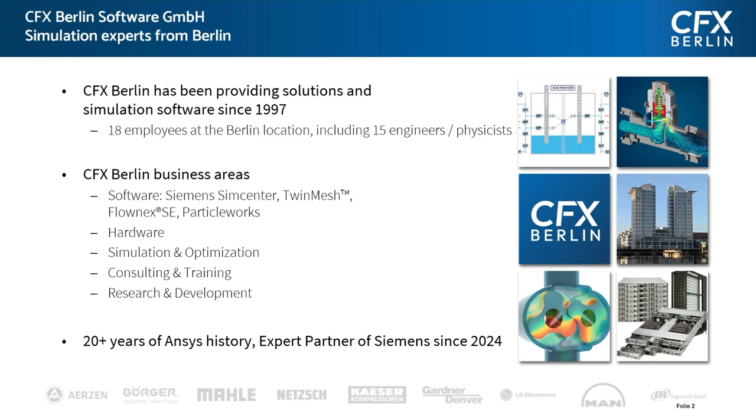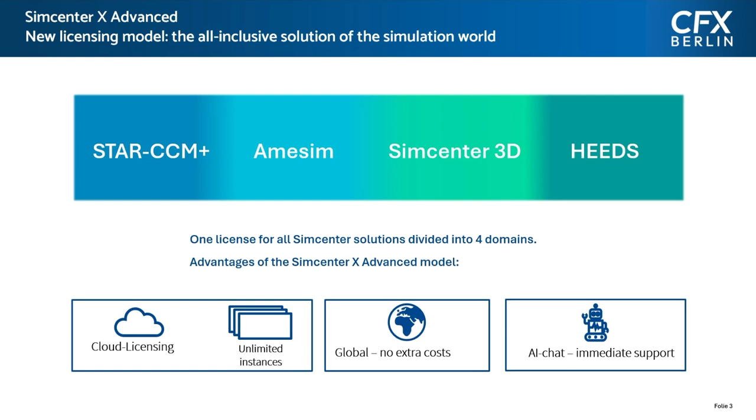Okay, so then let me start. Now let me introduce TwinMesh.

TwinMesh was developed by CFX Berlin to enable high quality CFD for rotary positive displacement machines, for example, for screw compressors or gear pumps or lobe blowers. And it brings all the required steps into one unified end-to-end workflow so users can work efficiently and focus on the physics instead of manual meshing and repetitive CFD setup tasks.

The workflow consists of 3 main steps. At first, the CAD import to extract the fluid volume and divide it into the stator part and the working chamber part, like you can see here on the flow from the left side. The next step is the meshing, where the stator mesh is generated.

You can use any meshing tool you have, for example, in Simcenter STAR-CCM+ or in ANSYS products. And the working chamber mesh is generated by TwinMesh, using a specialized meshing strategy, which I will discuss later. After that, TwinMesh will export a full setup, so you can start your simulation right after exporting all the meshes and the setup, because the CFD setup will also be available then.

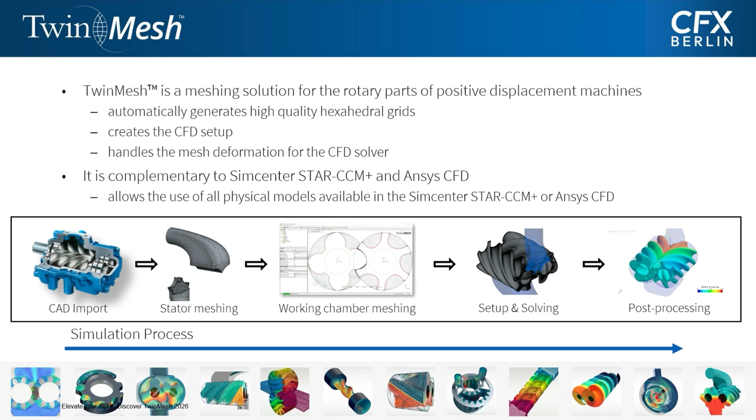So the next thing, where is TwinMesh used? TwinMesh is used across a range of rotary positive displacement applications. The key areas include screw compressors and expanders, screw vacuum pumps, gear pumps, gerotor pumps, and a lot more. We are proud to support leading companies working in these applications. Many of our clients have used TwinMesh for years and value its reliability and efficiency. On the right-hand side, you can see some of our customers which are using TwinMesh right now.

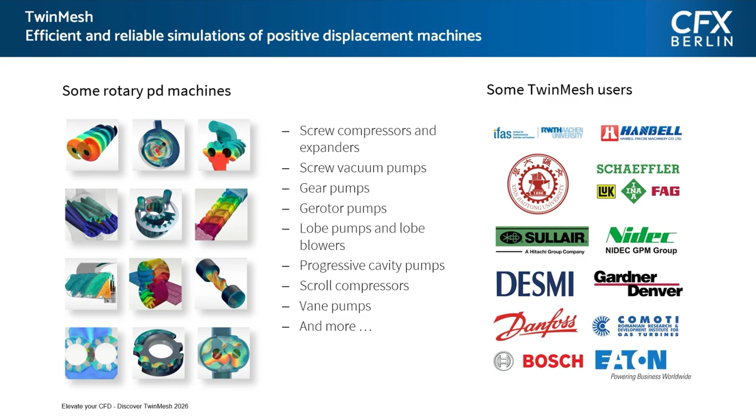So what are the challenges? The question is why we need TwinMesh. Let me illustrate this with a screw compressor, as shown on the right. The compressor is cut open so you can see the working chamber. There are two intermeshing rotors.

Due to the rotational motion, the flow volume changes continuously. Additionally, there are very thin clearances between the rotors, and between the rotors and the housing, in both radial and axial directions. Because the flow volume is time varying, a transient simulation is required. The fluid behavior can be complex in compressors. Compressibility is essential, and with high pressure and temperature, real gas effects become important. In pumps, cavitation must be considered.

On the other side, there is an interest in structural effects. For example, thermal deformation affects clearances, which could lead to leakage losses. Altogether, these factors impose specific requirements on the CFD.

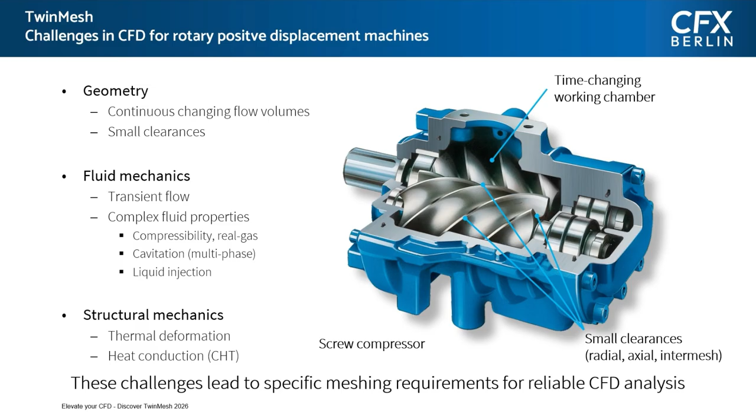So now let's look at the discretization options for the flow domain and why TwinMesh is needed. There are several meshing approaches, each with different strengths and limitations.

The first one is overlapping meshes. Could be that you know this type of mesh or meshing approach.

It's also called immersed boundary or overset. Here for the immersed solid approach, a background mesh represents the working chamber. In this case, the background mesh is the blue one, and you have in the foreground a mesh which describes the rotor solid, the orange part. During the simulation, the rotor mesh rotates.

In this case, the solver determines the overlapping volume, applies momentum sources, or combines the meshes to calculate the impact of the rotor motion on the fluid.

This meshing is simple, but there are drawbacks. For example, the near wall accuracy is limited. Boundary layer effects are hard to capture without fine cells. And the model becomes large. Runtimes increase and stability issues can occur.

That's why we go to the next type of meshing, which could be remeshing. With remeshing, a new mesh is automatically generated as the geometry evolves, resolving the domain at each time step.

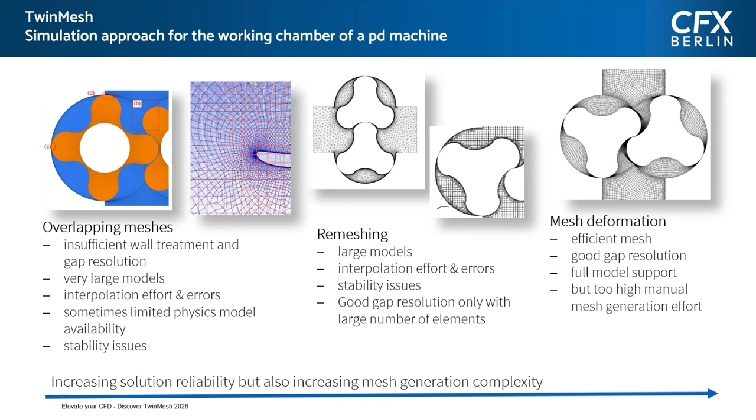And that's why we developed TwinMesh. It uses the mesh deformation approach, as I said, and automates the meshing process.

As you can see in the animation on the right, TwinMesh pre-computes the node position for every time step before the CFD run, ensuring consistent meshing quality throughout the motion.

It generates high quality hexahedral meshes tailored to narrow clearances. In the animation, you can also see some red markers which indicate the control nodes. The topology of the mesh stays the same, only the nodes are moving while the simulation is running.

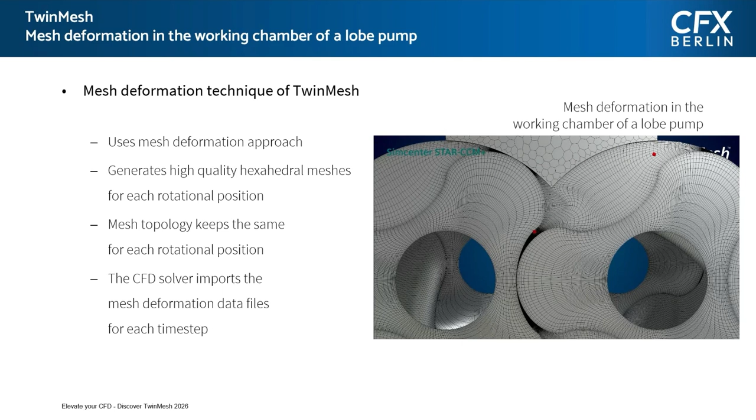During the simulation, the solver reads per time step files with the updated node positions. The mesh will be created before the simulation run, and then you have a lot of files, and the solver will import these files while the CFD solver is running.

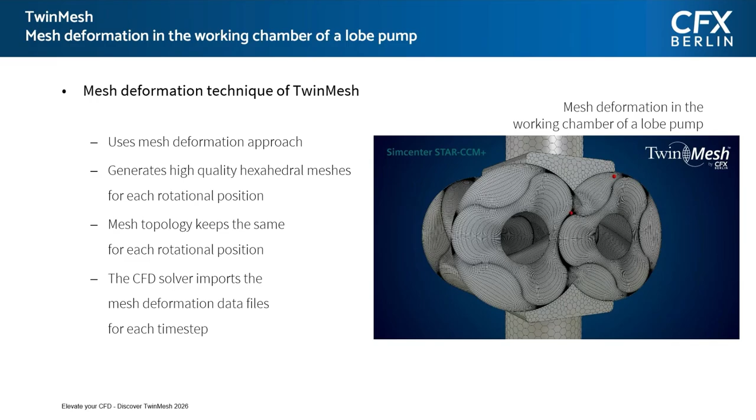Okay, this was a short overview, and let me briefly summarize the main advantages of using TwinMesh.

First, as I said, we have high quality hexahedral meshes, which accurately capture the working chamber and the thin clearances. The stator mesh before and behind the working chamber is meshed with a standard meshing approach, but the working chamber is meshed by TwinMesh.

TwinMesh pre-computes the node position for all time steps, ensuring consistent quality before the CFD run. This is essential because in other approaches, normally the solver will calculate the mesh quality or generate the mesh while the solver is running, and then it could be that the mesh quality goes down and the solver can crash. This is not an issue with this approach because the mesh quality is checked before the solver run.

In combination with Siemens SimCenter STAR-CCM Plus, this enables fast, stable, and reliable transient simulation. To automate the workflow, TwinMesh provides a ready-to-use template for the setup and also for the post-processing, so you can go from setup to results very quickly.

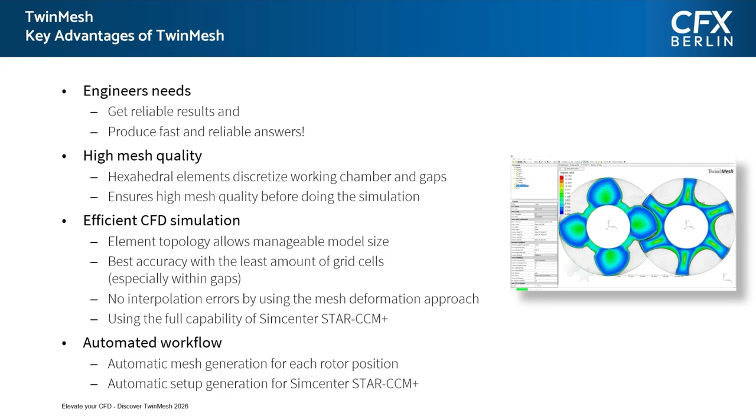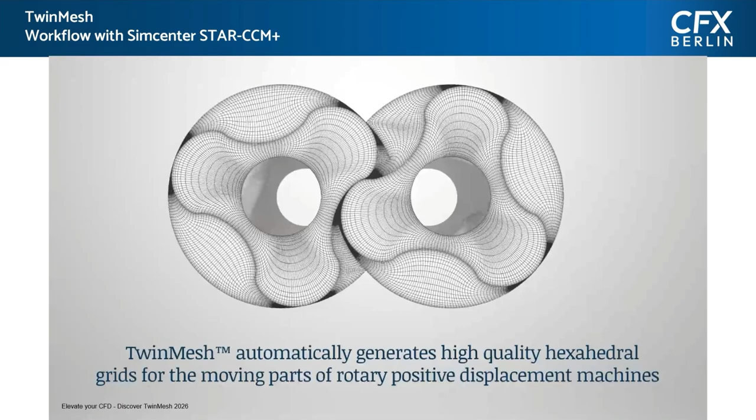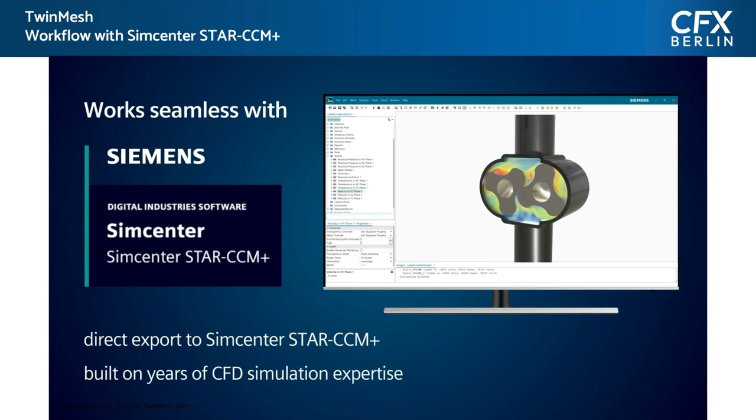So now let me take a look at how TwinMesh works in action. Here you can see the mesh of the working chamber generated in TwinMesh. In this short video, you will see the workflow and how the software simplifies the process for our clients. TwinMesh integrates seamlessly with Siemens Simcenter STAR-CCM+ and also with ANSYS.

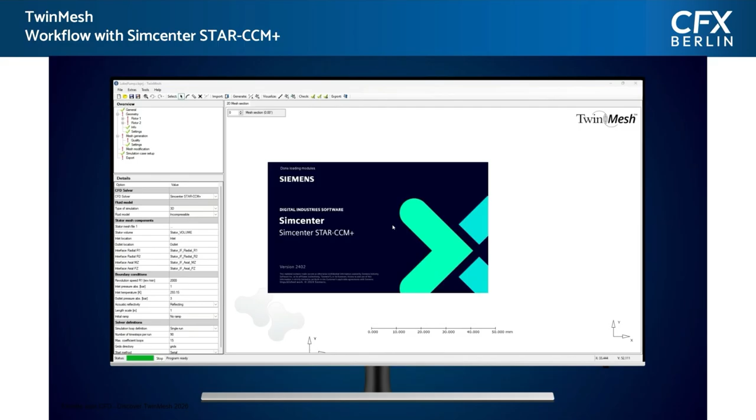We start by creating a new TwinMesh project. From this project, we launch Siemens SimCenter STAR-CCM Plus to prepare the geometry. We extract the fluid domain, split it into the stator and the working chamber, and generate the stator mesh using STAR-CCM Plus meshing. Next, we export the rotor curve, so the profiles from STAR-CCM Plus, and import them into TwinMesh.

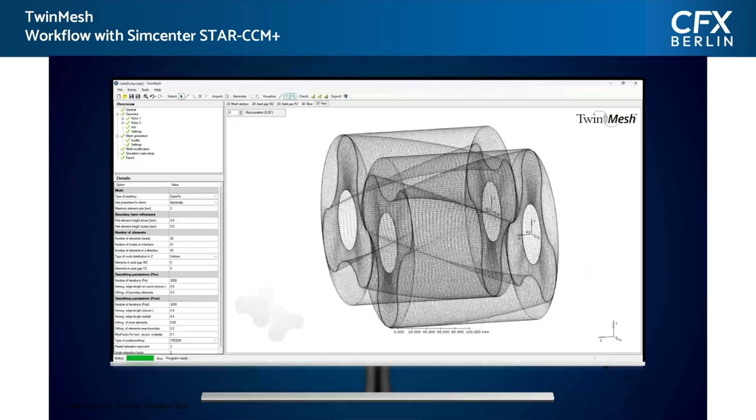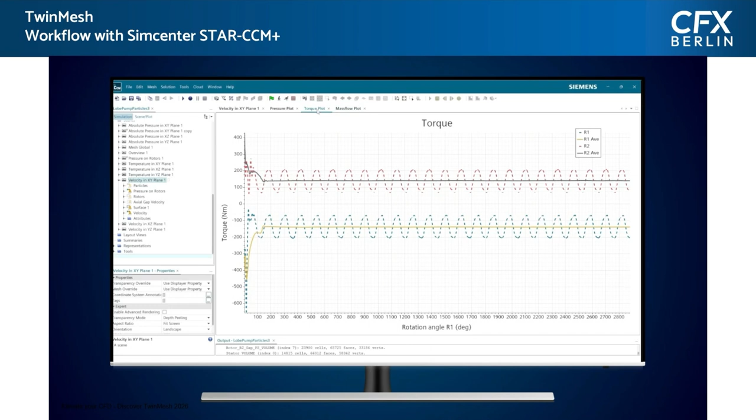In TwinMesh, we define the machine-specific parameters and the meshing settings, then generate the working chamber mesh and check its quality. TwinMesh exports all meshes, as well as a macro template for the CFD setup and selected post-processing tasks. Once the CFD setup is complete, you can start the simulation run right away and review the predefined plots and scenes.

So this was a little bit quick. After this webinar, I will show you how it looks like directly.

Okay, so now I'd like to show some simulation results that illustrate a typical task and user benefits. So first, for example, you can use TwinMesh for rotor design.

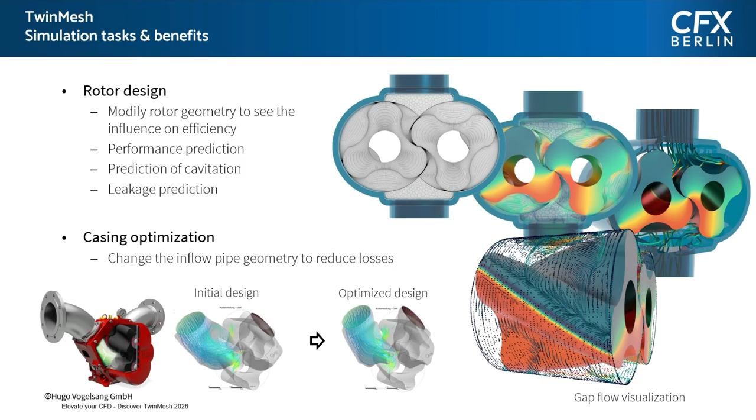In addition to visualizing the flow field within the volume, time-resolved information is necessary in order to compare the results with measurements or to better understand the effect of pulsation or noise emission. So this is the standard approach. You can export time-resolved pressure, mass flow at inlet and outlet, at clearances, and so on, to find out how they match the measurement data.

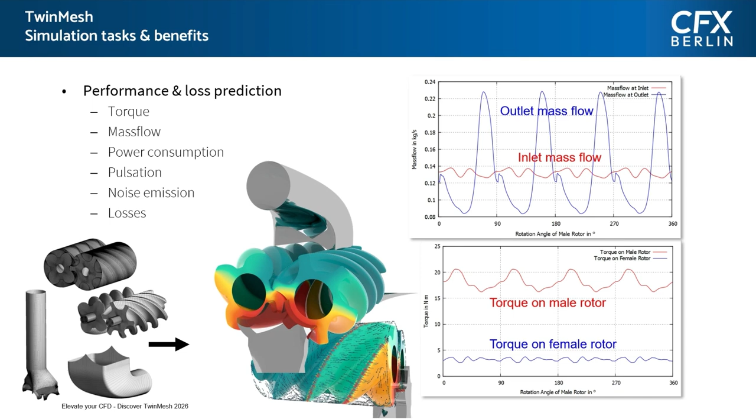With this result, you can find out where the losses are, and so you can modify your geometry, repeat your simulation, and have a look at all the result data to find out what is the best geometry for your case.

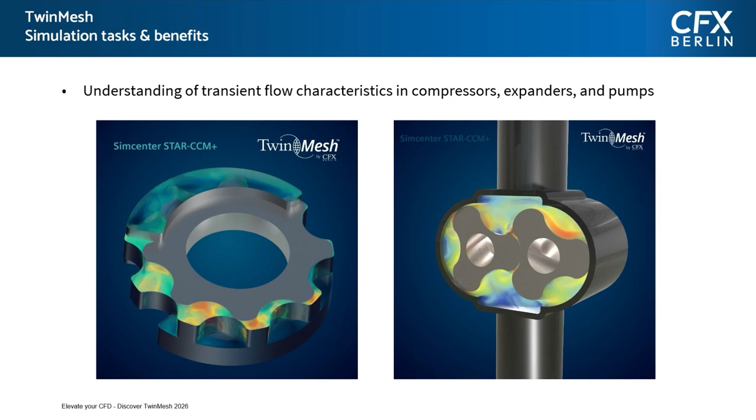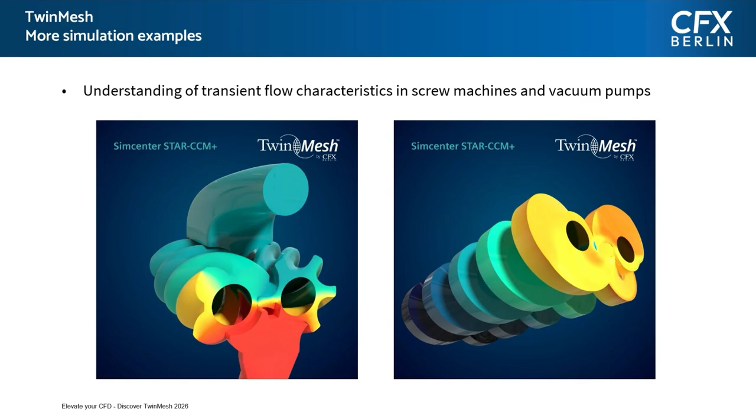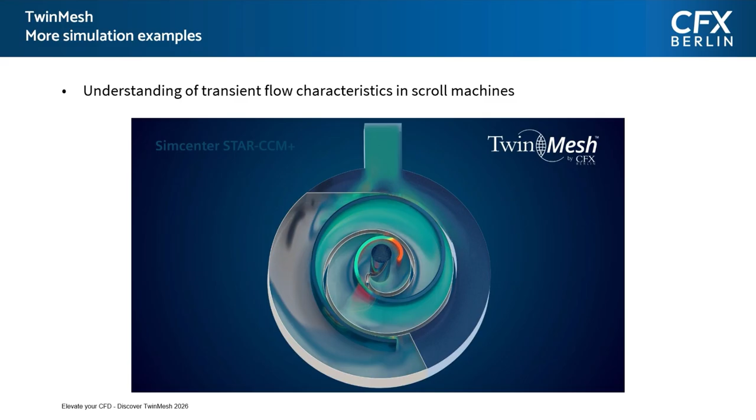Finally, the more complex application is the simulation of an oil-injected screw compressor. Here in Simcenter STAR-CCM+, it offers a wide range of numerical models that can represent the different regimes within the working chamber. One particularly efficient option is the mixture multi-phase model, which allows calculation to be performed as quickly as possible on a coarser mesh.

The mesh resolution and time step can therefore be adapted to the available computing resources, which further increases the accuracy of the results. The phase interface is handled here using an LSI and ADIS, which can be used to control how the phase interface is represented.

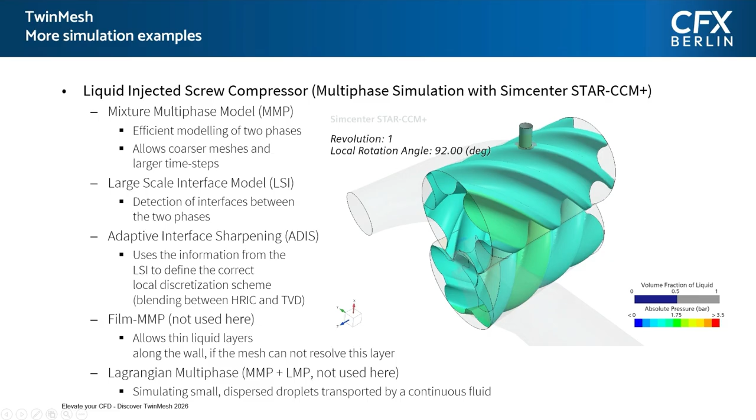Another thing is you can also couple this mixture model with a Lagrangian model. For example, if you have a flow with droplets, then sometimes it's important to see also the droplet path in the simulation. This is also possible, but not used in this case.

But that's not all. Here are some additional TwinMesh capabilities. If you have rotor deformation data, for example from a structural mechanical simulation, you can import this information by bending line or by thermal expansion.

TwinMesh can handle STL files coming out of your structural mechanical simulation. So you can see the impact of your deformation on the gap size and what effect it has on the efficiency of your machine.

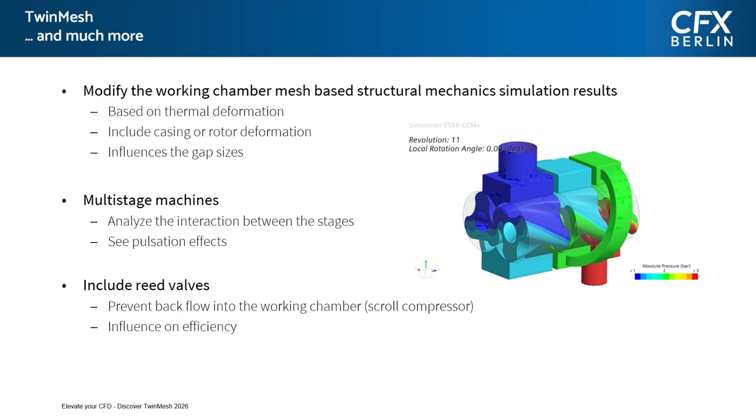For scroll compressors, you can also include reed valves, preventing backflow into the working chamber. We are constantly enhancing TwinMesh and adding new capabilities to meet our customers' evolving needs.

Now let me explain some new features in TwinMesh. In TwinMesh 2026, the main focus has been on automating the workflow, with the goal of integrating TwinMesh into the work process and thus reducing manual effort. It also reduces the risk of errors caused by incorrect input. As a result, the entire process can be accelerated, increasing the overall output.

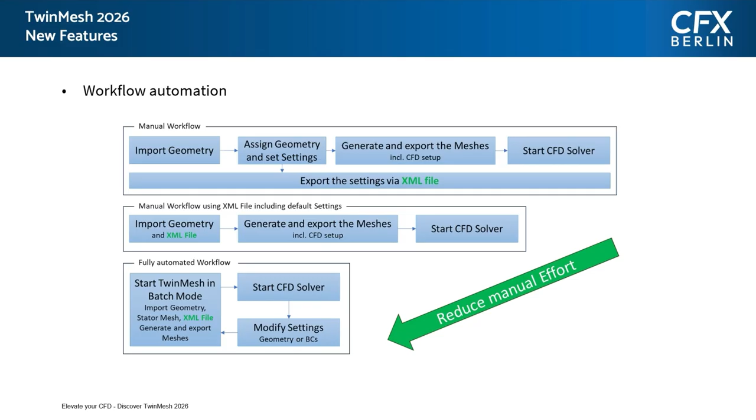It's possible to use TwinMesh without the GUI for generating the meshes, putting it into the workflow you have, and doing a lot of simulations.

This workflow also needs a possibility to define the setup of TwinMesh, not with the user interface, but with a file. That's why it's possible to import into TwinMesh or export out of TwinMesh XML files, which have the information of the current setup. So you can manually change this setup in a file and use it with your new project.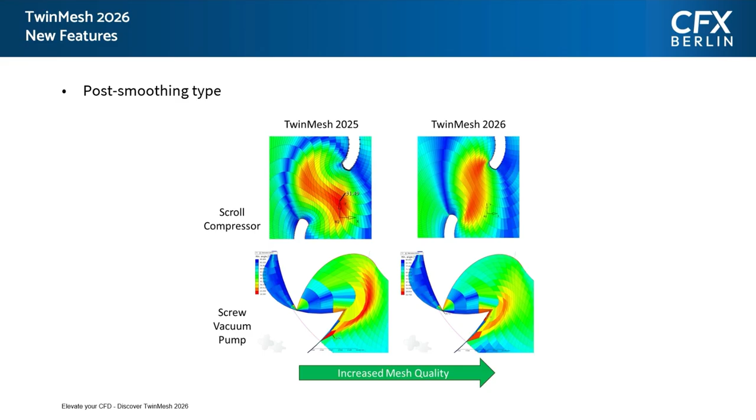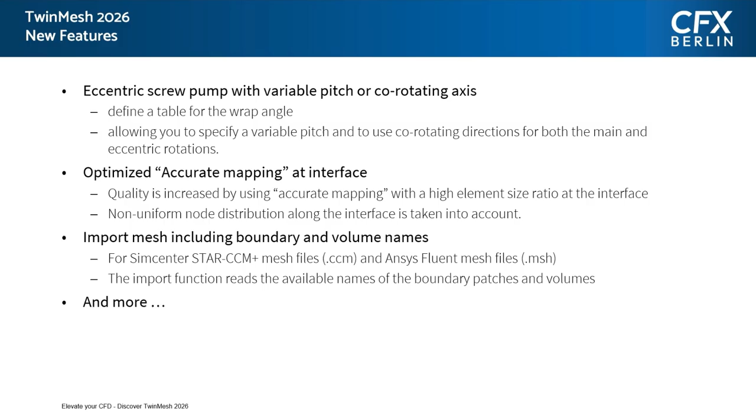There are also many other additional features, for example new options for modeling eccentric screw pumps, more flexibility for the interface generation, and advanced setup definition. This enhancement makes TwinMesh more versatile and user-friendly across a wide range of applications.

Before I finish my presentation, I will give you some upcoming features of the next release. The main focus was on giving an automated workflow for multi-stage cases. In the previous version, you had the possibility to do a multi-phase or multi-stage setup, but this was mostly manual in the CFD setup.

Now it's possible to export the full setup for this multi-stage Roots pump, for example, but also for other types, for multi-stage compressors or screw spindle pumps with different rotor profiles or gear systems. So it's very easy to set up the CFD with this new feature.

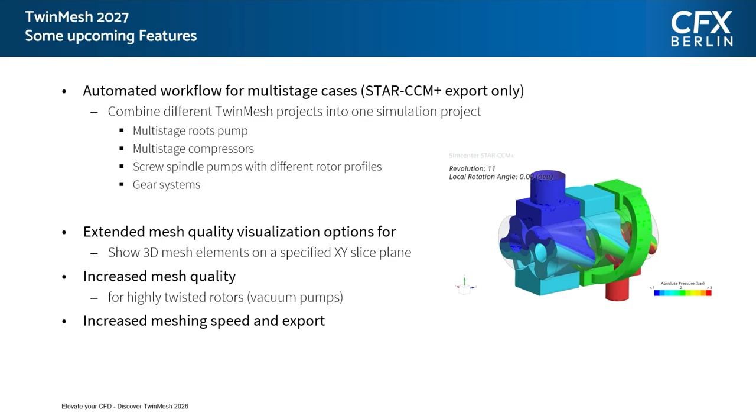And some more extended mesh quality options to show the mesh quality inside TwinMesh, and also increased meshing speed, export, and quality.

Okay, so this was my presentation. If you want more information, you can go to our website, twinmesh.com, and also our YouTube channel. There are a lot of other animations there where you can see how TwinMesh works.

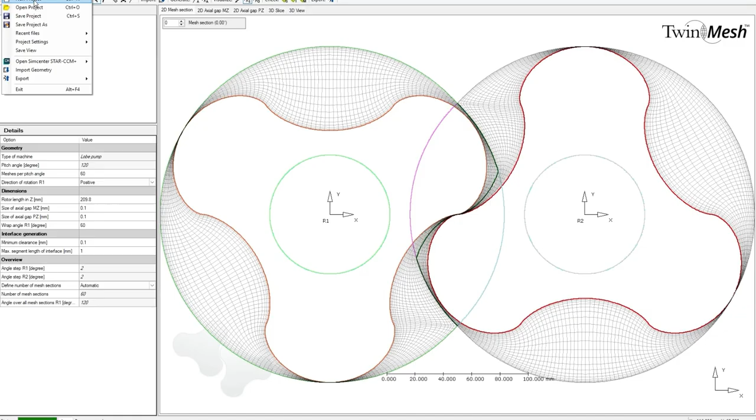The workflow in TwinMesh is really easy. You start your project by choosing the type of machine—we have different types here. You select the type of machine, and then the first step is to import the geometry.

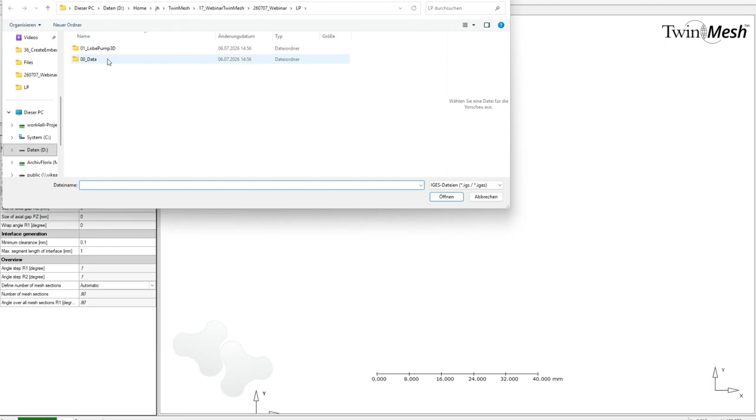The geometry represents the rotor profile or also the casing. In this case it's only the rotor profile, which comes out of your 3D CAD model. You select the profiles in your CAD model, export to IGES, and then import this IGES file into TwinMesh to bring in the rotor profile. It's also possible to use CSV files—if you have an Excel sheet generating these profiles, you can import that too.

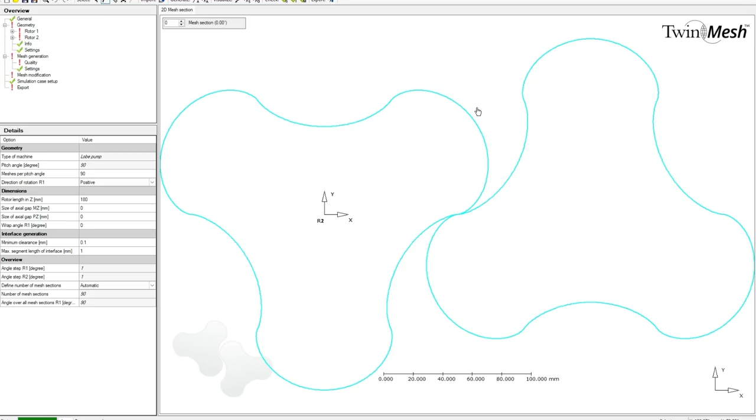The next step is to specify what each curve means. So this is rotor wall curve R1, this is rotor wall curve R2, and the casing curve is not included here.

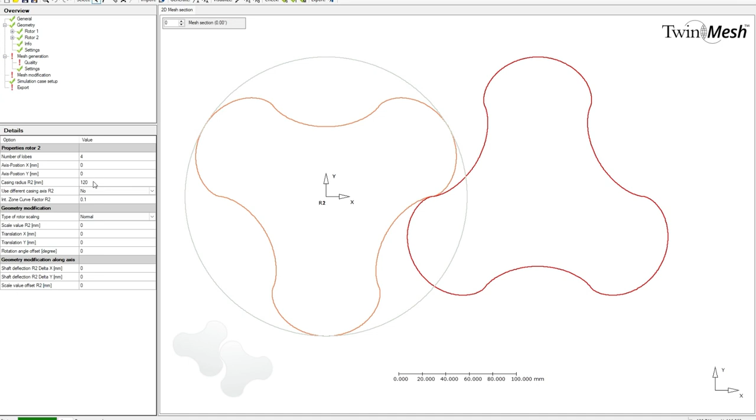If you have a circular representation of your casing, TwinMesh can generate this casing curve on the fly. So I can specify the casing radius, and I can specify and change the correct position—120—and then it works.

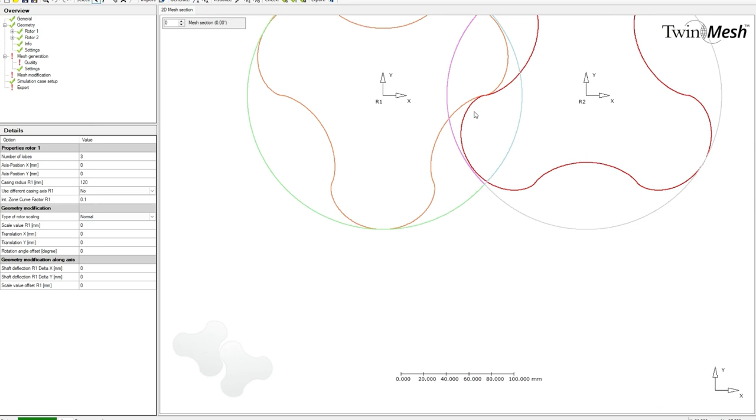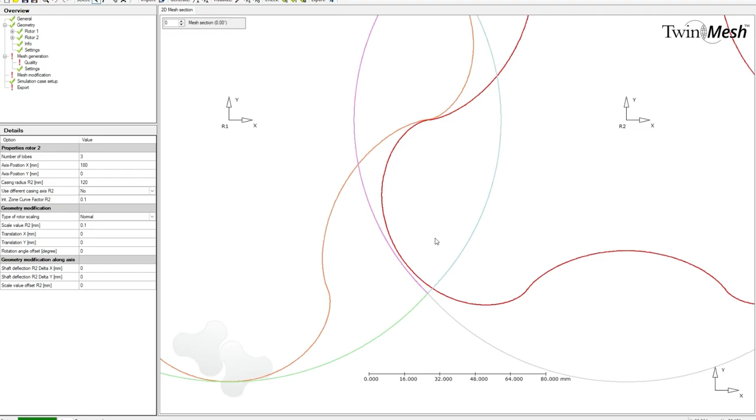You have to specify the number of lobes for R1 and R2—so, 3 lobes. Depending on your imported geometry, there could be no gap. As I said, in TwinMesh we need a gap, so you can either make these changes in your CAD model, or add an offset here in TwinMesh, for example 100 micron, and then you'll get a distance—a gap size between the rotors and also between the rotors and the casing.

Then the next step is to generate an interface curve. This normally happens automatically while the meshing runs, but in this case I'll show only how it looks—and only the first one, so it's faster.

What I can define at the beginning is how many meshes you need. In this case we have a pitch angle of 120 degrees. If I want a 1 degree angle step, I have to change this value, so you get 120 meshes, leading to a 1 degree angle step. Then I regenerate the interface since I changed the number of meshes.

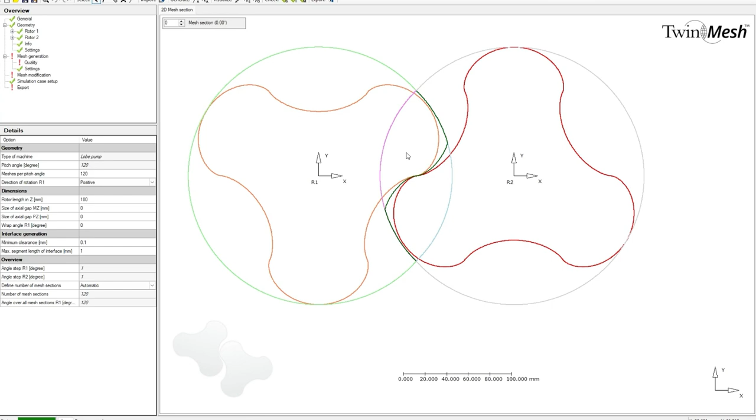Then the next step is to generate the mesh, or define the mesh parameters. You can define it globally here in mesh generation, for example a 3 millimeter size, and you can also increase the number of elements at the interface.

You can specify how many elements you want in radial direction. As I said, 20 is the standard value here. And a lot more, but these are the main settings.

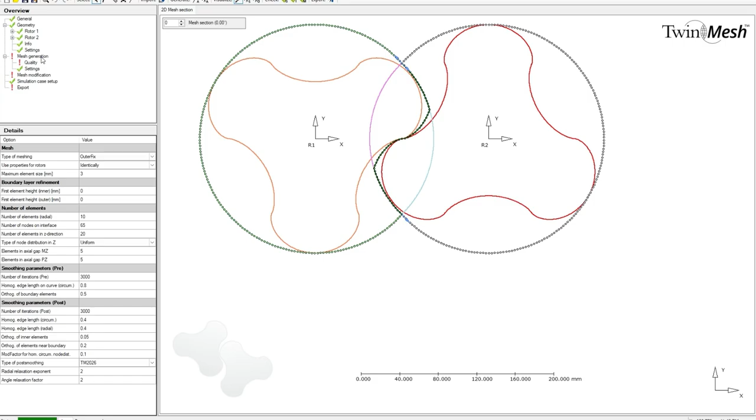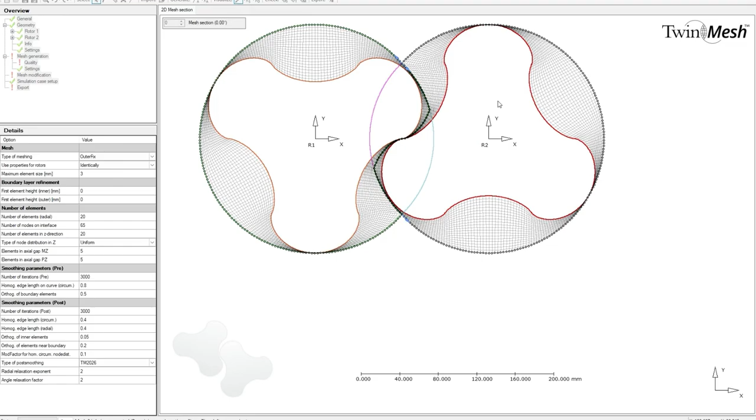And then you can check how the mesh is generated. I will do it only for the first. I've changed not the elements in radial direction, I've changed the elements in Z direction. That's why we have only this one, so now we'll get in radial direction.

You can also change the boundary layer. So if you want to refine the mesh along the wall, then you can specify a first element height here. And as I said, if I zoom in, you have 20 elements along the gap.

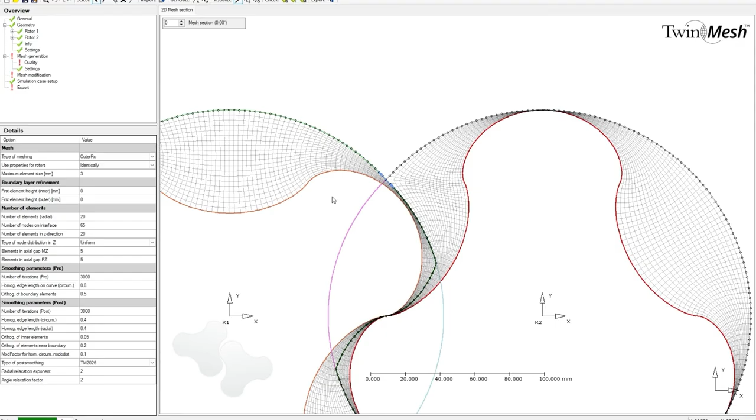Then you can check the quality of the mesh. Or if you want, you can also manually change the node position if you have difficult profiles, if this is necessary, but the standard will give you a good mesh.

Okay, so that's all for this one. Normally after this, you have to generate all the meshes for each rotational position. In this case, we have only generated the mesh for the first position because it takes some time, I think 5 or 10 minutes. I will open a final project where you can see how it looks like.

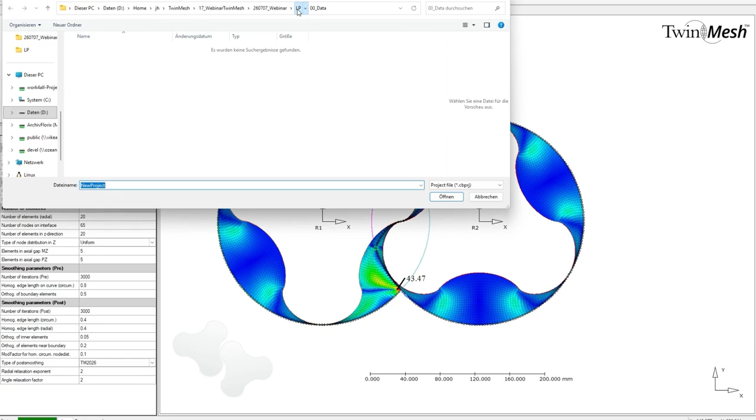So here in this case, I have a mesh for each rotational position. If I have every single mesh, you can also view it. And in this case, I also included the axial gap meshes. So you will get a mesh for the whole working chamber, and all connected meshes, inlet, outlet, will later be added to the CFD solver setup.

Okay, then you can check the 3D mesh quality and so on. And then after generating all the meshes, you can come to the CFD solver setup. Here you can choose the CFD solver you have, which type of simulation, what are the connected meshes, inlet and outlet, what is the revolution speed, what's inlet outlet pressure, and some settings for the solver themselves.

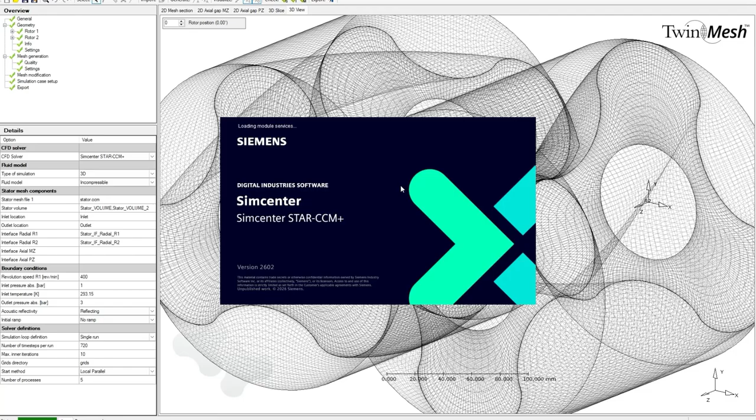And then depending on the solver you have selected, after the export of all meshes or the setup, the solver will start and also start the macro for defining all settings in the CFD setup. So these are importing the meshes, defining the physics, defining all the interfaces, defining plots, defining scenes to see what happens in the solver.

So this takes some seconds here. It's only running a macro to do it. Okay, so wait some seconds. Okay, I can show you how it looks like. So not only the setup is included, but also the post-processing.

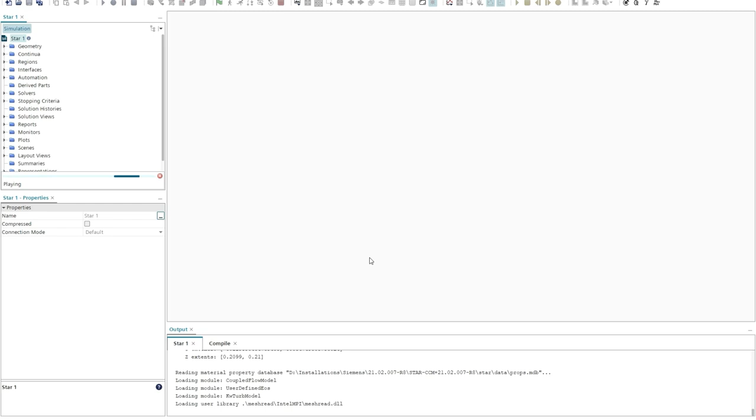Okay, now he has imported all the meshes - the stator meshes, the gap meshes, and the rotor mesh - and now only the physics and plots are defined.

Jan, how many cores are you using right now? In this case, only 5 cores on my local PC, but you can use as many cores as you want. It depends a bit on the size of your mesh. So in some situations, it makes no sense to use hundreds of cores if you have a really small mesh. So you have to check that there is a good balance between the mesh size and the CFD cores you want to use.

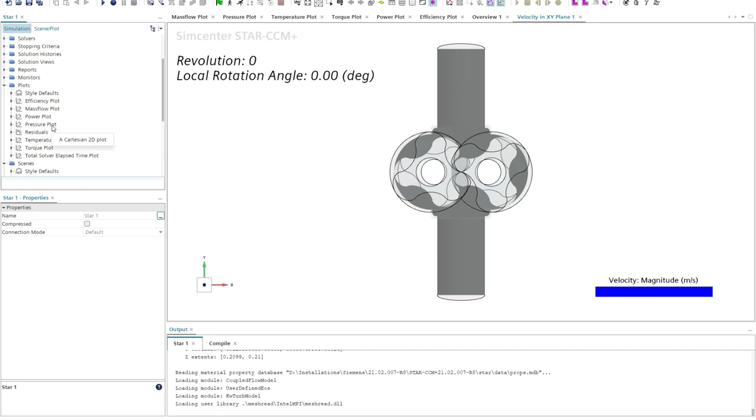Okay, so as you see, a lot of scenes where you see the flow field, a lot of plots where you can see what is the mass flow inside, what is the pressure, what is the temperature, and so on. And then you can start your simulation run right after exporting.

I hope I have exported all the meshes here in this case, but I think so. Yeah, and then the solver starts, and the advantage in STAR-CCM Plus is that you can see the results for each time step or each internal step on the fly, so you can react if you have done some wrong settings.

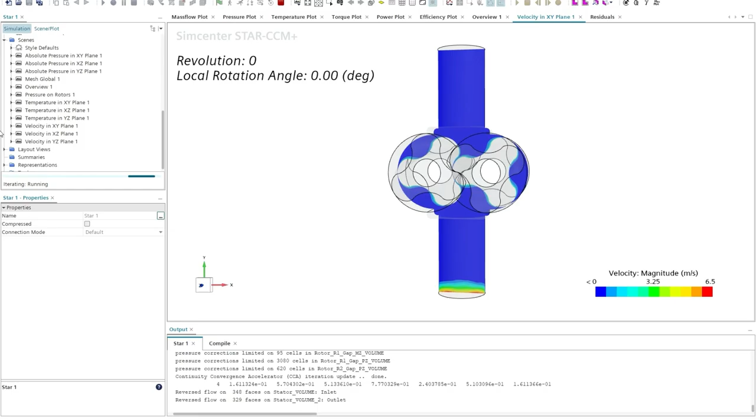So what we have here, pressure on rotors, is another predefined scene, but you can add scenes like you want. You can set up automated animation generation. For example, if you do the run and you want to see only the animations of a special view, then STAR-CCM Plus will generate only movies. But you can also save all the local data.

Okay, so that's all at the moment for this. If there are any questions, then...